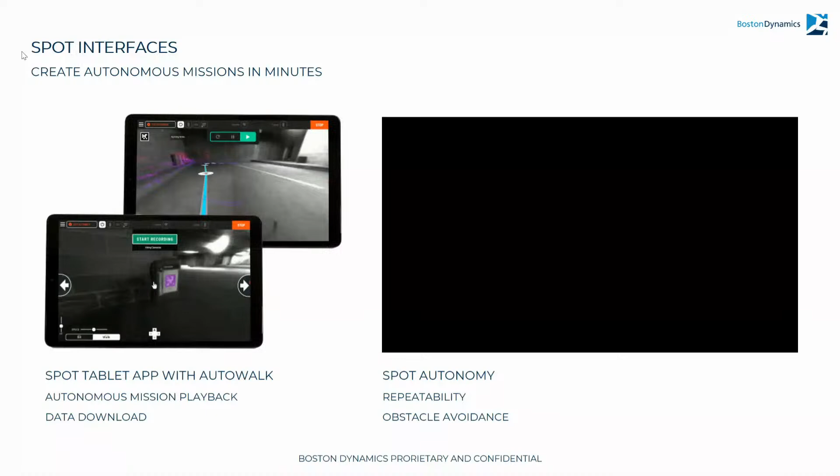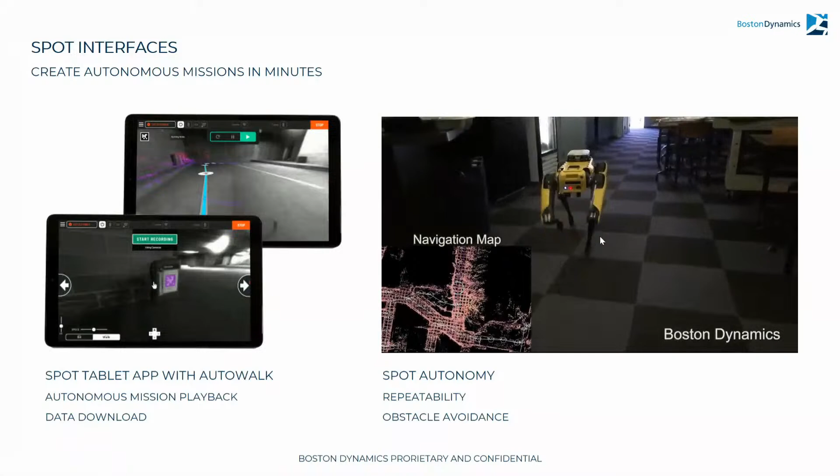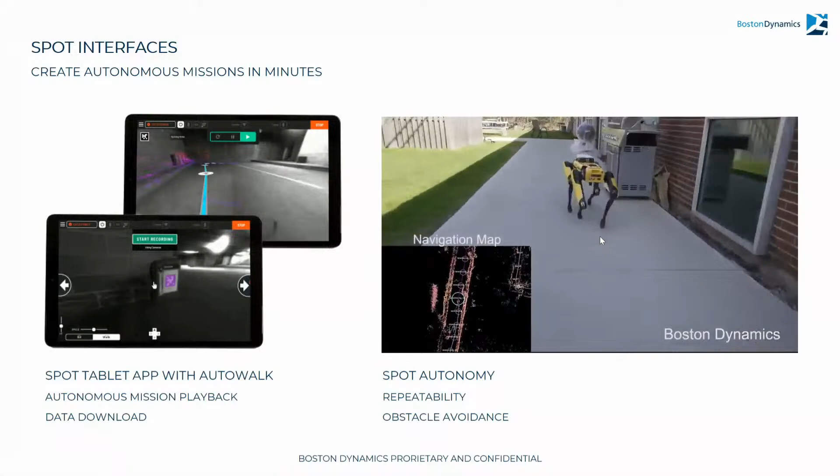The way that you control Spot, because part of what we're trying to do here is put something in the field that's usable by field professionals and does not require roboticists to operate, is that there's a very easy to use tablet controller. What that allows you to do is record autonomous missions, save them, and then play them back in the environment, even though there are dynamic obstacles and a certain amount of change in that environment, especially in construction sites.

In terms of the customization and the payloads, we knew that we'd have to bootstrap that a little bit with the robot. So Boston Dynamics offers a number of things that you add to Spot to make it valuable. Things like pan tilt zoom cameras, an arm for manipulation, onboard CPU for uploading your own code.

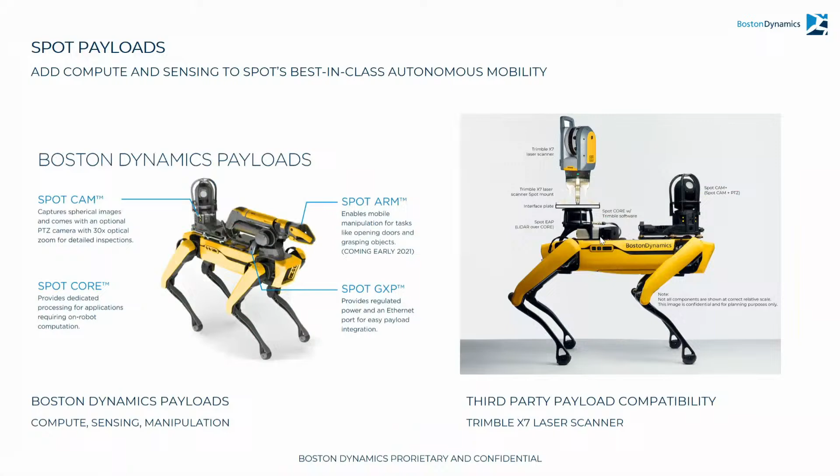But there's also a lot of third-party payloads. We're working with all the major scanning and surveying companies. A lot of people put simple things like Ricoh Theta cameras on there. It's really supposed to be whatever is useful to you and whatever you want to be able to control autonomously in the context of a Spot mission.

In order to let you do that, we really built out Spot and envisioned it as a platform. So there's a full SDK with sets of APIs that allow you to capture Spot sensor data, integrate your own hardware, such as laser scanners, and then integrate Spot data and capture into software applications like project tracking software.

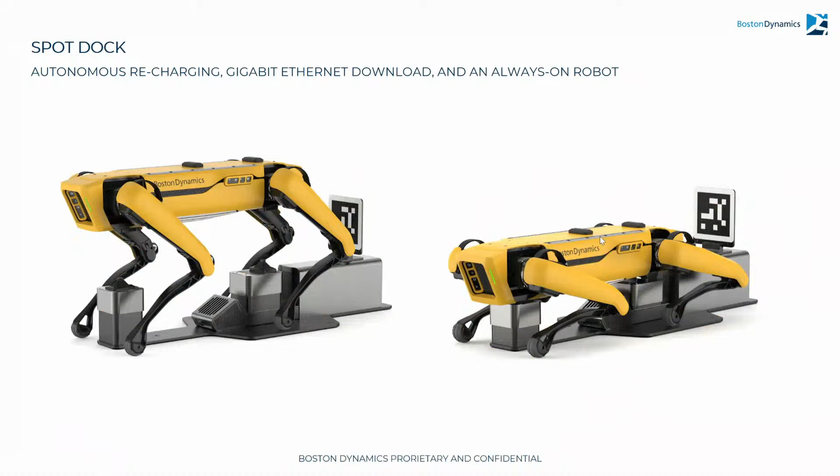We also know that in order to have true or truer autonomy, the robot needs to be self-charging and able to operate with minimal to no user intervention. So this year we released the Spot dock, which not only self-charges the robot in the context of missions, but also allows for large amounts of data download while it's charging over gigabit Ethernet, and gives you basically an always-on robot that you can dial into at any moment.

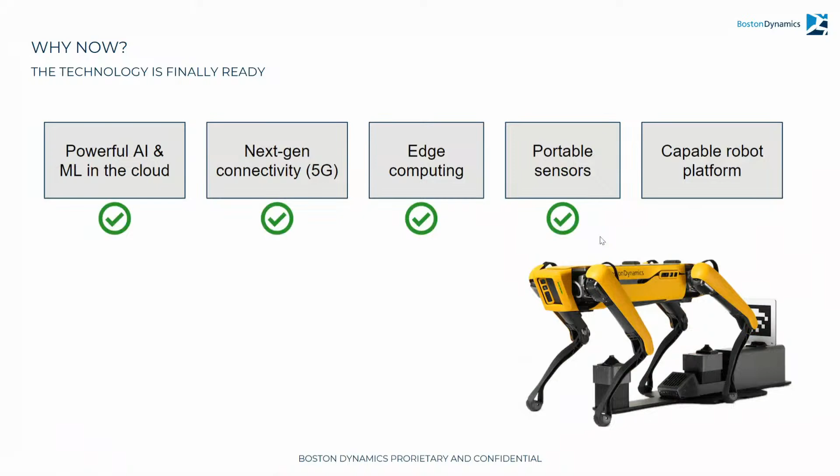So one of the questions is, why Spot today? And I think it's just part of a tech stack. There are a lot of other parallel technologies that make this valuable, including portable sensors and the emergence of better connected job sites. And why robots instead of other systems?

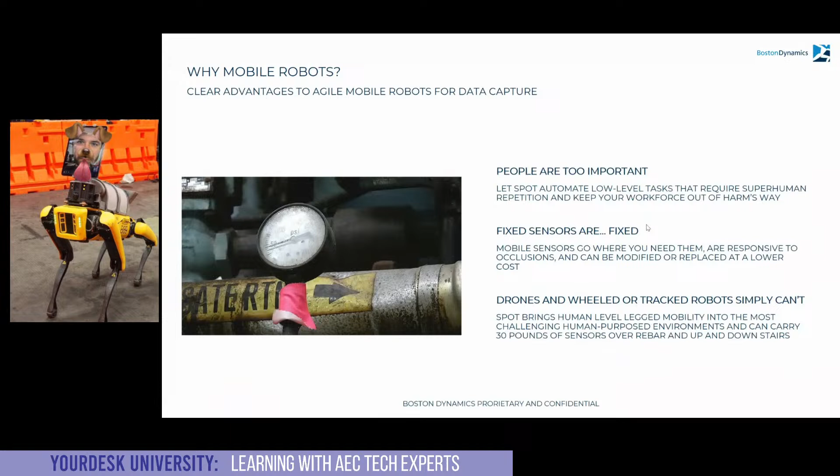Well, we think that people are too important for these low-level tasks and frankly can't do them in the same repeatable manner. Fixed sensors are very limited, and you can take it from me in my former job researching this, but drones and wheeled-or-tracked robots simply can't navigate around complex construction sites.

This is a video from 2018, the first time Spot was on a construction site in Japan. This is the video I saw when I was a researcher at WeWork that made me furious that WeWork wasn't the first company to be using this, and what ultimately led to us being an early adopter the following year.

The platform was launched in 2019 and really kind of got going with the early adopter program in 2020. We ask all the same questions around automation that you'd ask with really any automation process, ultimately trying to figure out how do you fundamentally reimagine the building delivery process.

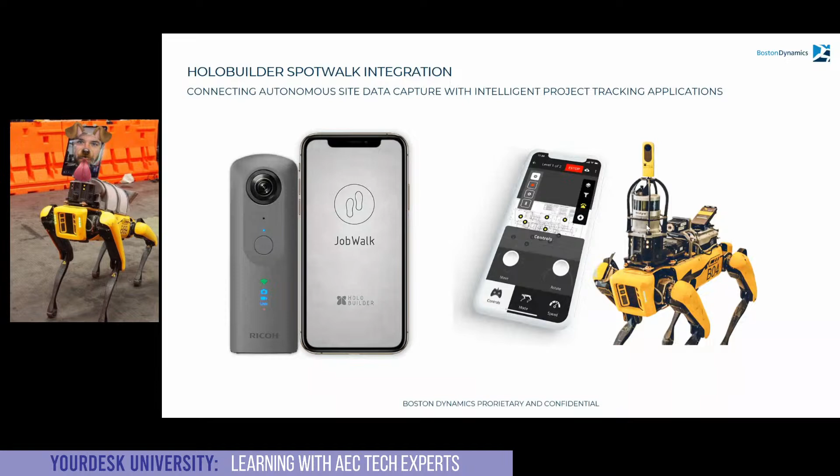So I just wanted to run through, kind of in closing, a number of integrations we have. The robot works with HoloBuilder for job site documentation and pinning 360 imagery to blueprints. Works with DroneDeploy. We have a partnership there for 360 video and pinning paths for virtual walkthroughs. That's also compatible with drone information that can be combined with Spot information.

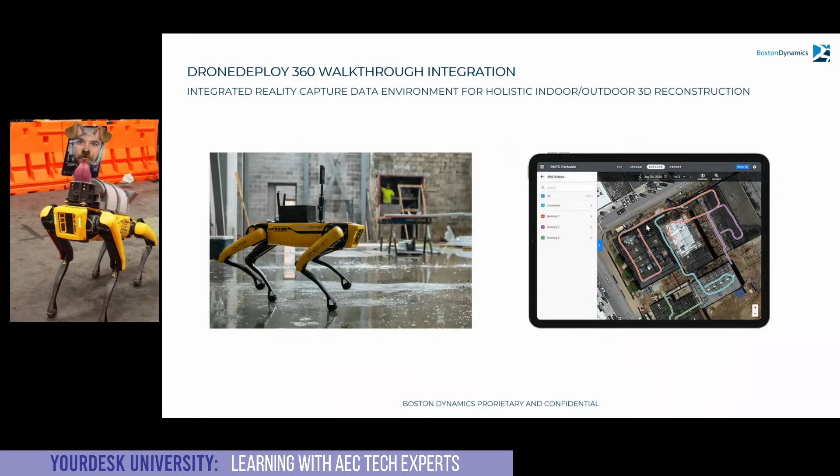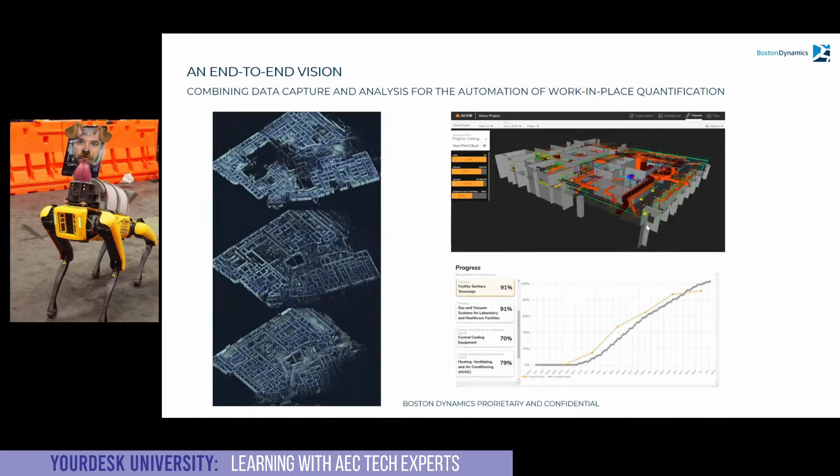If you're going to scan every single day with a robot, the opportunity there is really one of being able to track progress. You're moving from scanning for due diligence once or twice during a project to now scanning being less costly, so you can do it every day. And if you're doing it every day, you can lower the resolution such that it's optimized for automated work-in-place quantification, which then leads to other things with tracking.

So I'll go ahead and close there so that we can pass it over to the next speaker.

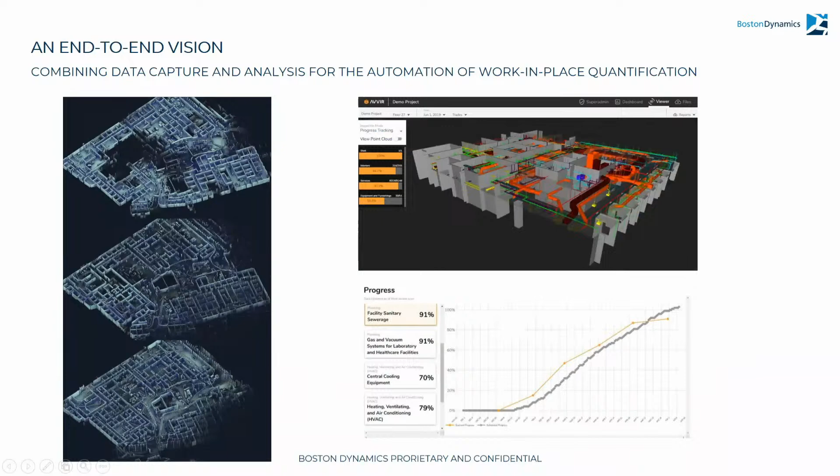Great. Thanks, Noni. I think you'll be up. One second. Are you seeing the screen?

Yep, okay great. My name is Noni Pittenger, and I actually used to work with Brian at WeWork on some of those initiatives in construction robotics. Brian mentioning the beginning of Spot is very nostalgic in my mind.

My work in construction automation and applied construction robotics is really focused around problems in VDC coordination that make me very frustrated. Without being a high level or really skilled engineer in any one of the VDC or hardware programming skill sets, I basically got really interested in project coordination from a technical side. One of the things that really stands out to me in construction is the handoff and cliff information deficit model that we have.

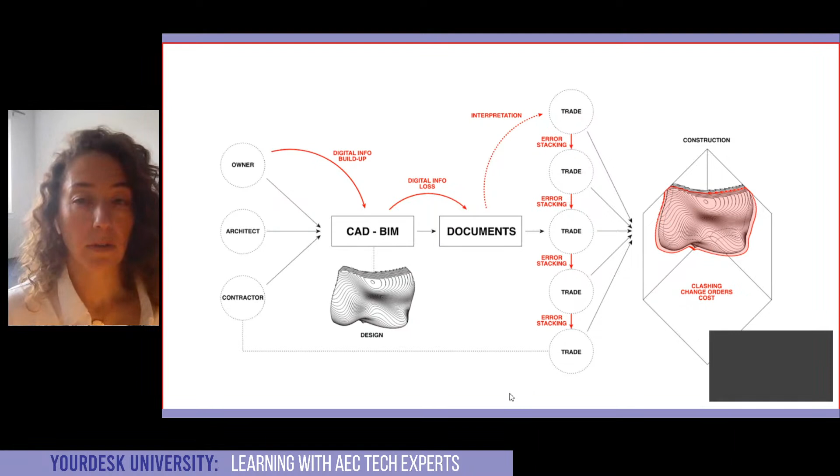When I was at CW Keller and Associates, we were building the interior panel system for the Coca-Cola stage at the Alliance Theater. Each of these balconies has hundreds of half-inch steam-bent oak stringers that are parametrically optimized for acoustic properties across the entire room. They all need to join end to end at the stringer resolution.

So it was very, very precise, and it was a material with a ton of deformation and deflection, so we were getting into some really big templating problems. We had a really fine model, but basically none of the materials would behave in a predictable way, and we had no way to verify the complex 3D geometry in the built environment.

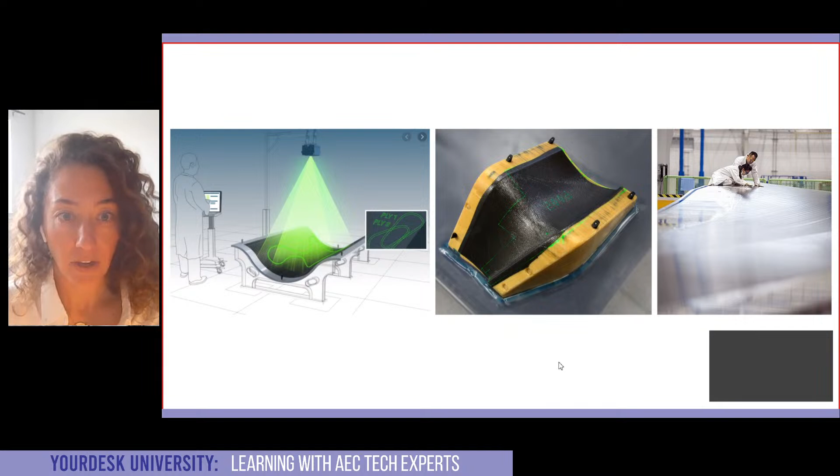So we started looking at applying some existing aerospace tools. In carbon fiber layup for complex curvature, such as in airplane wings, there are some tried and true laser projection systems that calibrate to the surface you're working on and give you the 3D instructions laid out there. So when building something like one of those panels, we're going from a hybrid or completely analog process downloaded from a 3D model to being able to verify every single part in the sequence as we go iteratively, so we can track tolerance and telegraph issues.

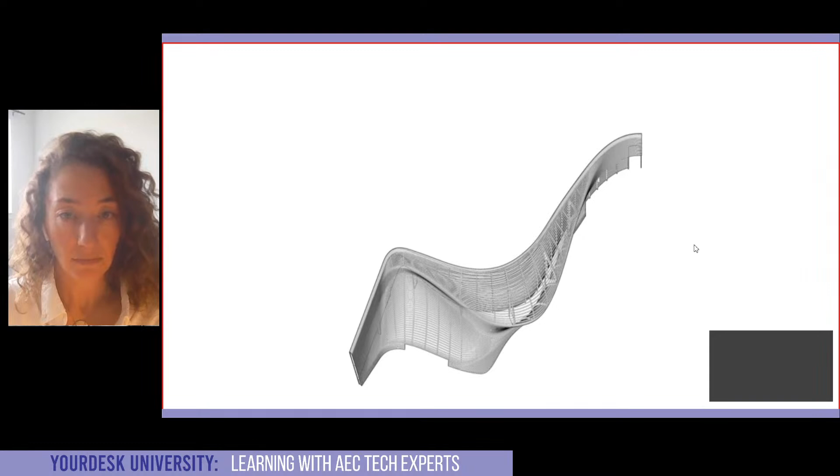We can also use it to verify built product as an adapted QA/QC process. This is important because if you can't do adequate scan verification for contractual delivery, this was a way we could pass our panels out with assurance that they would fit.

So this research spun into: if we're calibrating a special tool to a part, how can we start to calibrate that tool in a different context to the job site? This is really where I got into site layout automation and, by extension, construction robotics.

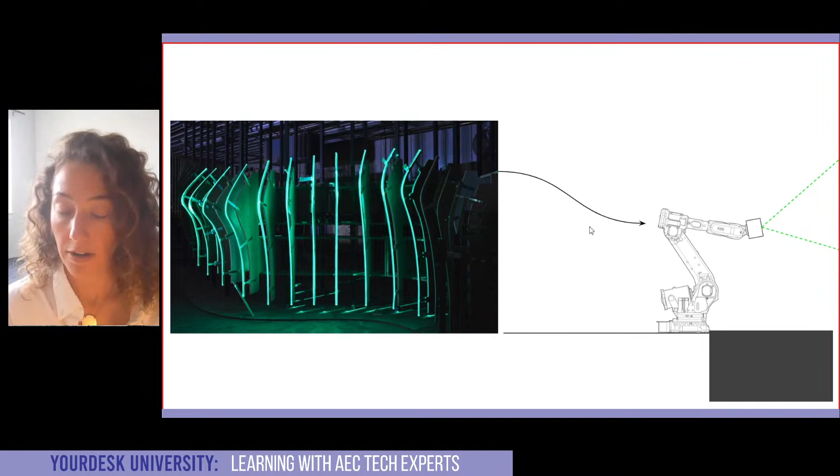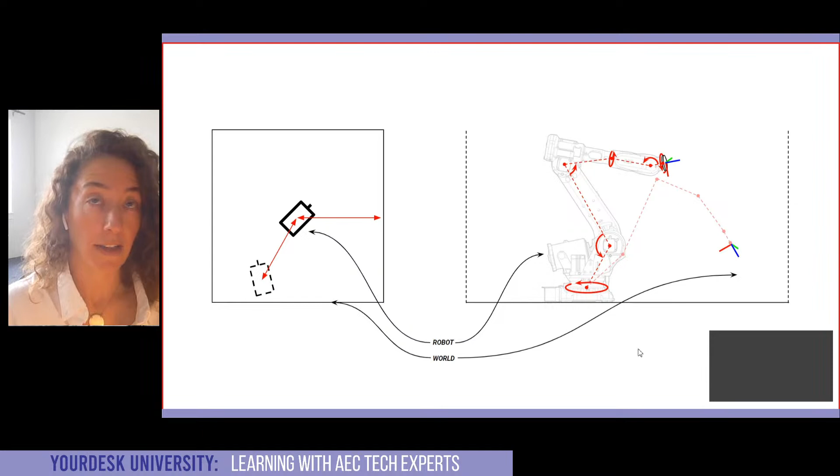So if we're looking at how a robot, whether it's a rover or an arm, is going to relate to the world, you have the same type of information going on that you're exporting between your CAD model to a projector and then verifying in the same place. Construction robotics works with many different ways that you can see and sense the world, and then you have a lot of different options of what you do with that data. A lot like what Brian was saying, it's about what type of information and at what resolution you want.

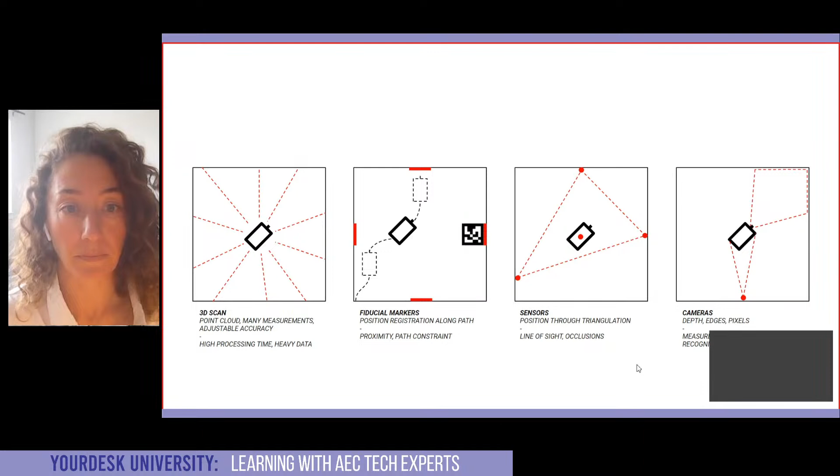And then what do you want to optimize that for so that you can interpret it quickly? So a different workflow this was approaching was, if we can erase a lot of the 2D processes and just work with spatial coordination in a digital twin, we have a lot more options and a lot more precision, and we can do a lot more complex work.

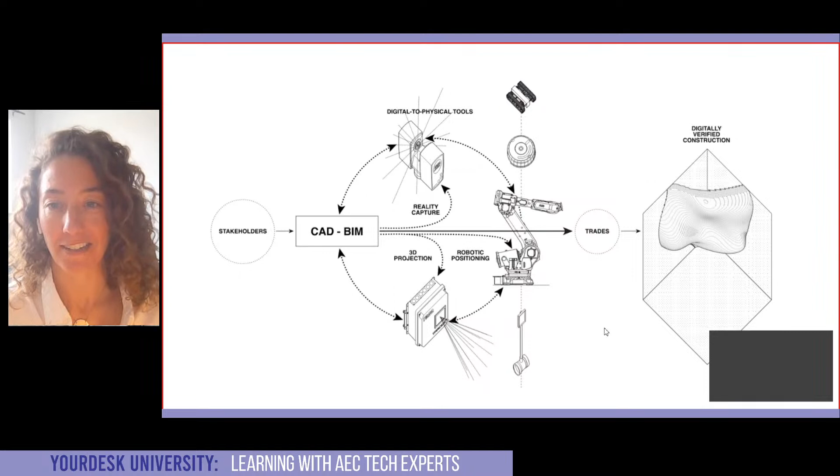So this is just a proposal to basically keep everything within a live model and then fabricate on a job site from the live model. This has been tried a lot in the industry, and there's all kinds of problems with it, but this proof of concept was a really big step forward for me in understanding tolerance issues in the real world from robotics.

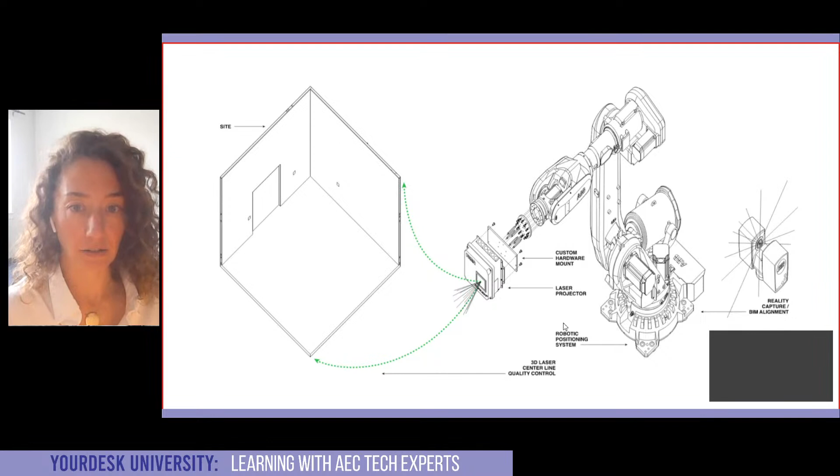So the particular hardware stack we worked with at Autodesk was, we worked with a scanner and multiple layers of reality capture. We had a robotic positioning system and an ABB arm, and then we had a Faro Tracer 3D laser projector, and then we had our site.

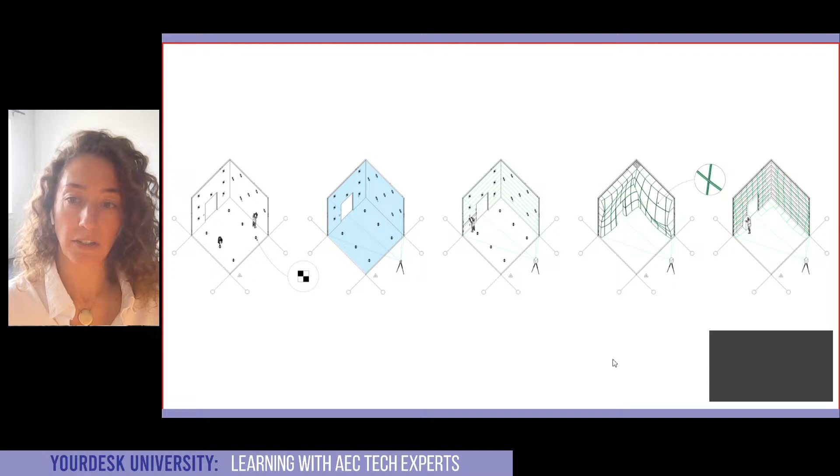And this is kind of like, what are your inputs and outputs in a situation like this, and what do you expect to get? This is basically how we propose it would work, where you are calibrating this tool to the job site via scan and robotic positioning accuracy.